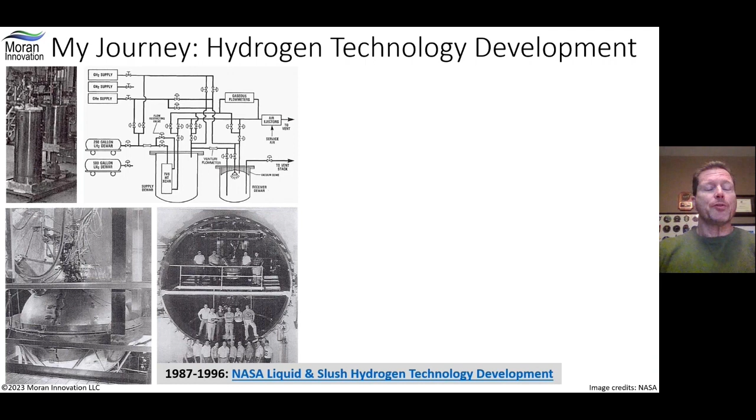And spoiler alert, it can be very exciting responses that you don't want, or it can be very controlled. And understanding those parameters was very important to us at the time, and it remains important, of course. These ground tests during this time frame were to inform flight tests and space exploration programs. But of course, they're useful now for a lot of the groundwork and energy and mobile vehicles on the Earth. So I'm getting a lot of interest in some of this early work that I did in the 80s and 90s.

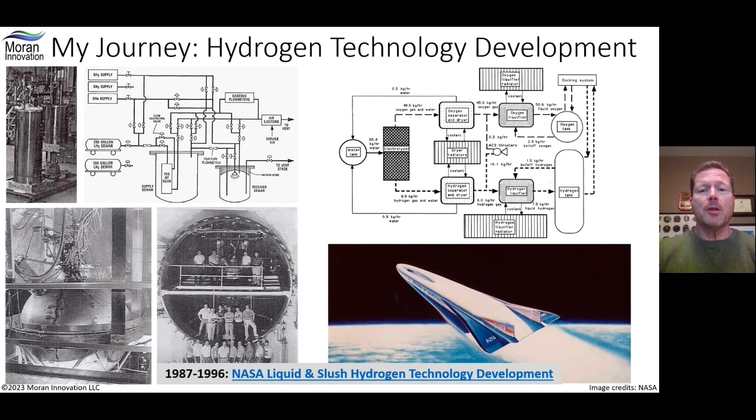The bottom right one is the National Aerospace Plane that I worked on. We did slush hydrogen research, both in terms of technology development and also systems demonstrations. And slush hydrogen is a mixture of solid and liquid hydrogen, and we had up to 50% solid fraction in many of those tests. So a lot of interesting stuff there. And of course, you can pack a lot more hydrogen in when you store it that way.

Well, that changes in space. In space, you don't have gravitational effects, or it's a low gravity, microgravity environment. So the position of liquid and vapor changes. It's driven a lot more by surface tension, by accelerations in the vehicle and that sort of thing. So you have a very different thermodynamics, not totally, but it's certainly very different. So that was a large part of the kinds of research and testing that I did, looking at these kinds of phenomena.

But the evolution in my personal journey was to then start looking at how do you integrate these into launch vehicles and other vehicles of various sorts. And of course, there's corollaries to this in the kind of vehicles that are being looked at now with liquid hydrogen. And then in the bigger picture, how do you integrate this into system architectures, whether in this case it's a space exploration system, or whether it's an export of liquid hydrogen by shipping, for example, or an energy storage of some type, where you've got an architecture where you store and distribute it where you need it. And then finally, what are the key interfaces, which always come into play?

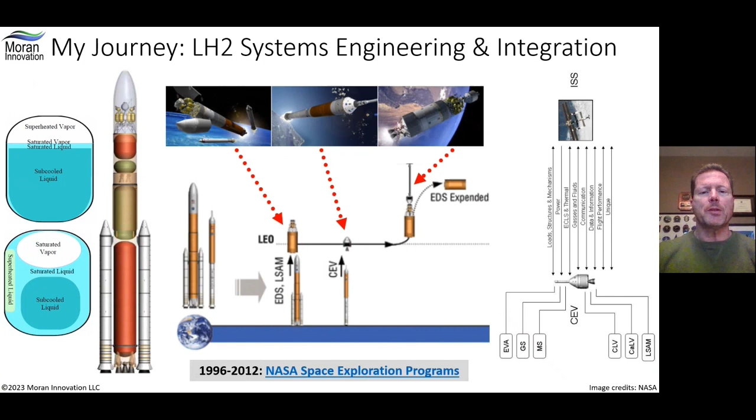One of the things I was responsible for in this time frame was the interface between the new crew exploration vehicles and other visiting vehicles that were coming to the space station, the requirements for that interface. So this was a very important period in my own personal development to understand this big picture, and it has informed and driven my perspective on things going forward. I always look at it from that architecture and then drill down into what solutions make the most sense for that particular system, or system of systems, as the DoD likes to talk about.

So my responsibility in that last 4 years that I was at NASA was to set up and negotiate license agreements with industry partners, trying to transfer that technology and that know-how out to the energy industry in particular, but other industries that were interested in it, as well as the materials. That borrowed heavily on my experiences that I did in my, quote, spare time on the evenings and weekends. NASA allowed me to start multiple companies as long as there wasn't a conflict of interest with my work at NASA. And that's what I did from the mid-90s through today. 5 of those startups I did up through 2016.

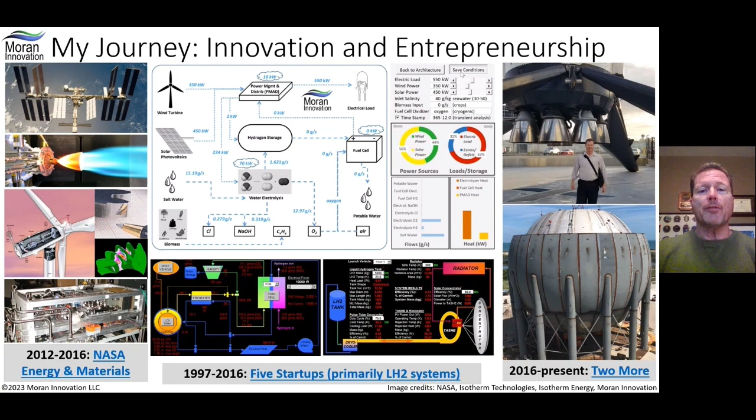And I'll have a lot more to say about that, because there's a great deal of misconceptions about the fact that you have unavoidable boil-off with liquid hydrogen systems, and that's just wrong. The advances in cryogenics, cryocoolers, and cryorefrigeration have gotten to the point now where you can eliminate the boil-off completely and actually re-liquefy.

And this is sort of the compass for this webinar series going forward. It's also equivalent to that time when you get on a plane and the flight attendant tells you what the destination is and tells you that if that's not your desired destination, you need to get off the plane. So this slide is sort of that for folks who look at this and don't like what they see. You're in the wrong place. You don't want to be here or in future sessions.

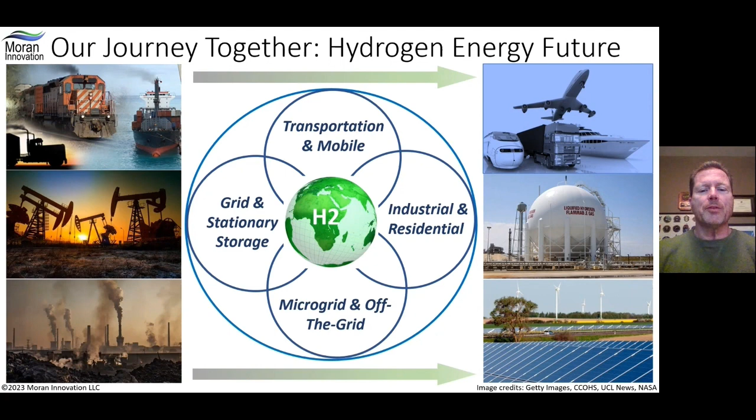On the other hand, if this is a journey that you'd like to take together as a global community and want to be involved in this, you're in the right place. So stay put, and I hope you continue to tune into these sessions. So I'm going to start off with 3 whys. Why is a very powerful question. Toddlers learn it very quickly to challenge the status quo. In their case, it's cookies before dinner or something of that nature. We're going to use it to challenge the status quo with legacy fossil fuels.

So first of all, why transition away from fossil fuels? I think you'd have to be living under a rock for a long time to not understand the climate side of this and the changes. This is a great resource available to folks. I'd invite anybody to take a look at this. This is hard data. This is evidence. And you can look it up. You can see how it's changed over time.

On the left-hand side here is all of the causes. Again, I think these are fairly well known, and we're living through almost all of these right now. In fact, all of them. We've already seen the impacts, and we are heading down this path at a very scary rate. This isn't really news by any stretch of the imagination.

This is fascinating, and by the way, these are all links that I have in these slides that I'll make available afterwards. Carl Sagan gave a congressional testimony in 1985 that basically described every bit of this and told all of us we were going to go there. Al Gore was actually one of the senators in this congressional hearing, and of course, years later, as vice president, he started to focus on this. But I would encourage you to listen to the late Carl Sagan talk about this. It's fascinating.

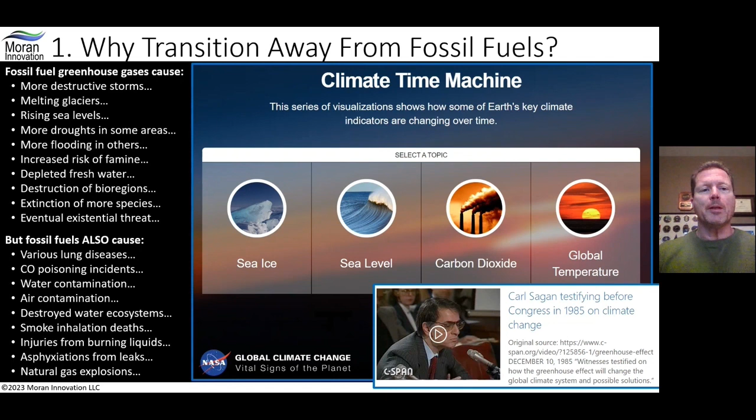Second, why transition to hydrogen? Well, the short answer is to mitigate everything on the previous slide. So just to give you a recall from 1 second ago, that's everything on this slide. Everything is addressed immediately by the transition to hydrogen, or it begins to improve immediately and continues to improve over time once we make that transition or begin making that transition. So that's the short answer. There's a few others here I'll just bring up quickly.

Hydrogen is fascinating from the standpoint that it's an energy carrier, an energy storage method, and a fuel, all 3. That's very unusual in terms of solutions that we have to tackle this issue. It also does not have many of the drawbacks of the other solutions. Now, it has its own. All solutions have their pros and cons, but I'm mentioning here some of the things that are the Achilles heel of many other solutions that simply aren't an issue for hydrogen. It's a very simple, straightforward solution in many regards, and these are some of them.

And then a final aspect of using hydrogen in general, including liquid hydrogen, that is often overlooked, and that's the ability to produce large quantities of potable water from non-potable sources in many cases, including seawater. So there's a lot of synergies here in regions where water scarcity is a problem or is becoming a bigger problem. And that's something that's unique to hydrogen. I'm not aware of any other solution that provides the ability to actually create large amounts of potable water. So something to keep in mind.

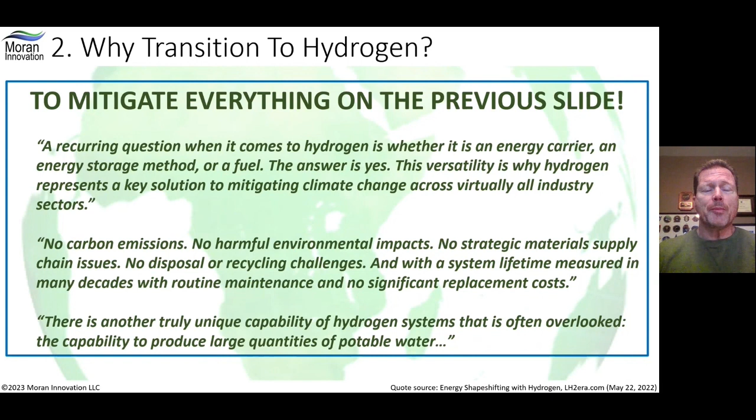So the third why. Okay, if you're convinced of hydrogen being at least a solution to have on the plate and being considered, why liquid hydrogen? This chart has a lot of information on it, but I'll just call your attention to the far right. Any of these solutions make sense for particular use cases, obviously. The question is, when does liquid hydrogen at cryogenic temperatures start to make sense? And that's going to be, as I said, the focus of this webinar series, and it's where my core competency is and where my company's project portfolio is focused.

So when you look at liquid hydrogen, it's low pressure and at a very low temperature as well, minus 253 degrees C or 20 degrees K.

So of course, the low temperature is a challenge. The low pressure, however, is a benefit compared to some of the other options you see there, because you don't have to have large, very thick composite overwrap or other materials that can maintain the kind of pressures that you have in some of these other options.

Liquefaction is the main work input. I use the term work input. That's a thermodynamic cycle terminology, but think of it in terms of the electrical energy that you have to put into the system to get it into the storage mode that you're trying to do. And all of these systems have some amount of work input that you have to provide to store them in the way they need to be stored.

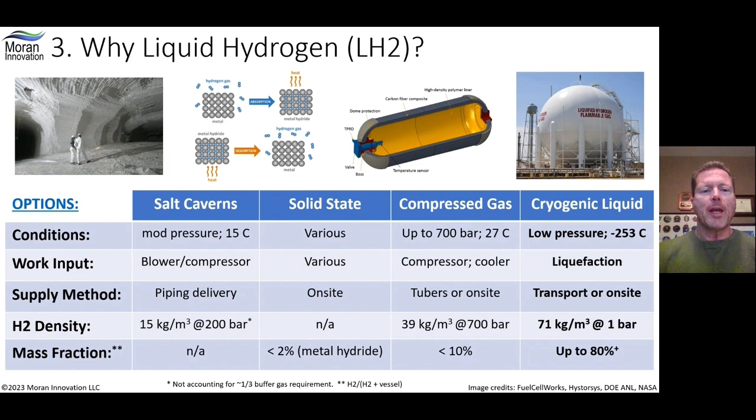And depending on what your application is, for example, the shuttle external tank was in the mid 90s or maybe even upper 90s mass fraction. So those kinds of numbers are possible. Again, I see a lot of quotes and a lot of talk of folks talking about mass fractions. And they keep quoting compressed gas and claiming it's true of all hydrogen storage, and it is not. Liquid hydrogen is much higher.

So I came up with a mnemonic just for this webinar, and I liked it so much, I trademarked it. But it's 2020 vision for the countdown to hydrogen.

Before I get into that, let me describe this graphic very quickly. This is from the U.S. Department of Energy. It is gravimetric density across the horizontal axis. So that's the amount of energy in a unit mass of hydrogen. And then on the vertical axis is volumetric density. So that's the amount of energy in a particular unit of volume. So liter, whatever volume you want. So on top of this then are all the points for various fuels.

What I'm calling the fantasy fuel in the top right corner doesn't exist, but that's why I'm calling it a fantasy fuel. That's where you would love to be. You'd love to have a very dense, both gravimetric and volumetric, energy dense fuel, but it doesn't exist. So you have to make some trades. The trades we've made for the last several decades are the legacy hydrocarbons that you see over kind of the top left there that have a high volumetric density, but a rather mediocre gravimetric density: gasoline, JP8, diesel, and so forth.

You can make the trade to have a little bit less volumetric density, about the same gravimetric density, if you go to propane or liquid methane. Liquefied natural gas, of course, is mostly liquid methane. So you can kind of think of that when you see the word methane. The problem, of course, there is that methane is a 25 times more powerful greenhouse gas than carbon dioxide. So even if it's cleaner, quote unquote, burning, any leakage or releases that you have in your system is having a huge impact on greenhouse gas emissions.

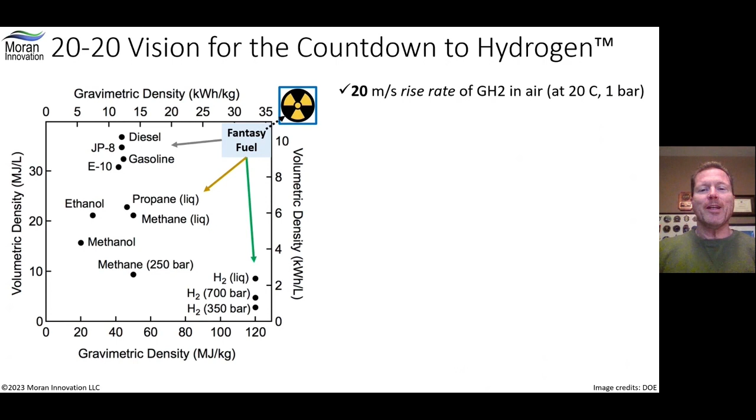And by the way, that's the reason why hydrogen is safer than most legacy fuels in many applications, despite what many people's preconceived notions are. Again, in the safety session, we'll talk more about that. The second 20 in 2020 vision is 20K. That's the temperature in Kelvin, which is equivalent to minus 253 C for liquid hydrogen.

And then the countdown starts at 5. These are the 5 safety tips that you keep topmost in your mind with hydrogen. The first 3 are with any hydrogen: ventilation, leaks, and ignition sources. The last 2 are specifically for liquid hydrogen. Cryogenics, you've got to make sure you have precautions that you're working at very cold temperatures, and phase change from liquid to gas, and in some cases the other direction, that you have to have in mind with operations and design of your systems.

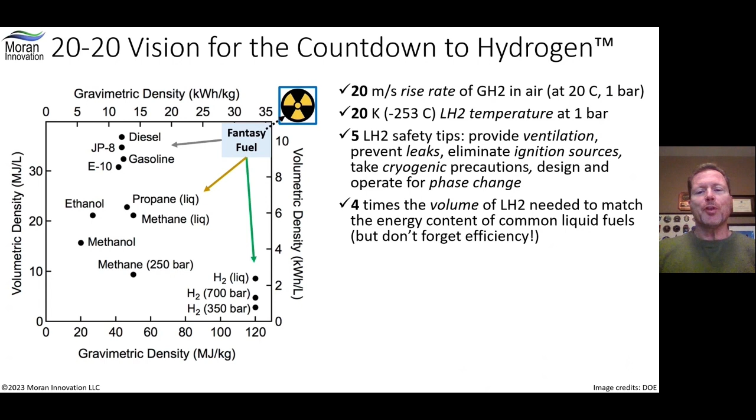4 on the countdown is the volume of hydrogen needed to match the energy content of common liquid fuels, but don't forget efficiency. If you're using a fuel cell that's 2 or 3 times more efficient than your combustion process, then you are starting to eat away at that differential in the amount of volume that's required of hydrogen. 3 times is the energy content by mass of hydrogen compared to the other fuels. So for the same kilogram of hydrogen, you're getting close to 3 times the energy as the legacy fuels we use.

There's 2 spin states of hydrogen, ortho and para, which becomes very important when you start talking about liquid hydrogen at cryogenic temperatures. Again, a topic for the future. 1 proton per atom, which most folks know, and then of course 2 atoms per molecule of hydrogen, and that's why you see H2 used, or LH2. That's what the 2 stands for.

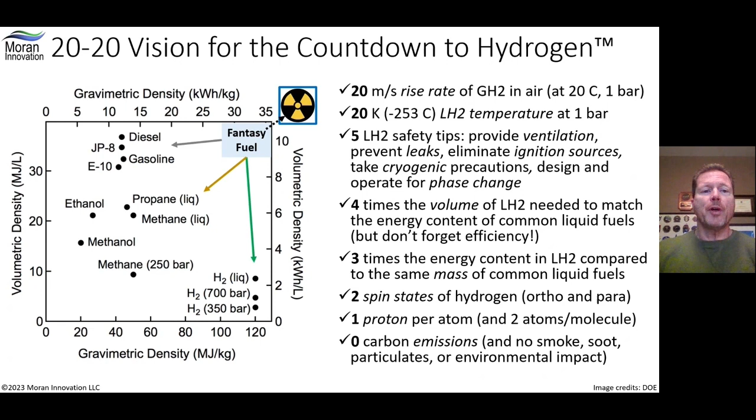And then finally, 0 is the amount of carbon emissions. And as we talked about before, no smoke, no soot, no particles, no environmental impact. And that's another topic we'll talk about in myth busting. There's been some information about that. So I'll end this part of this session with this final slide.

When I finished my career at NASA and started my 6th company, this was our vision. The nexus between energy, water, and food that could be addressed by hydrogen anywhere in the world with renewable energy 24 hours a day and 365 days a year. So this is my call to action, if you want to consider it that: let's build a better future together with hydrogen.

And with that, I'm going to do just a quick look at what sessions are coming up, to whet your appetite. Future sessions, we're going to talk about history, evolution, and testing. If you did the pre-test that I had out before this webinar, you know that hydrogen was the first fuel used to develop jet engines in the 1930s. A liquid hydrogen aircraft engine was successfully flown in the 1950s. A liquid hydrogen engine with afterburner was developed and ground tested successfully also in the 1950s.

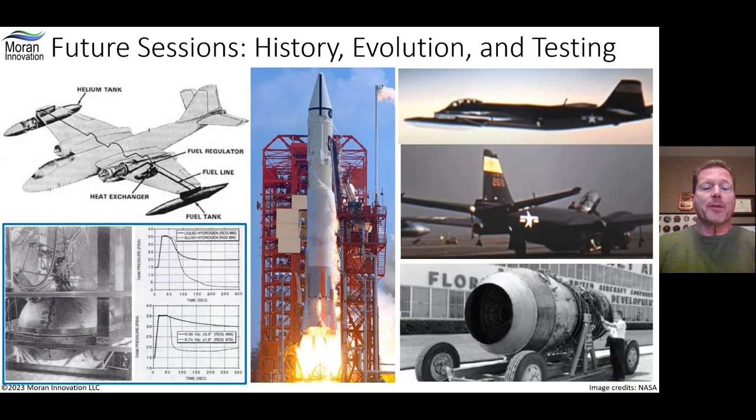And then in the early 1960s, it made the jump to the space industry, and aviation and aeronautics kind of got amnesia for multiple decades about the benefits of hydrogen, while the space industry built out basically all of the necessary technology and systems for large-scale use of liquid hydrogen. So we'll talk about that. Another future session will be on basic safety. This seems to be a very important topic of interest to many folks. So we'll go through how to design and operate liquid hydrogen systems properly.

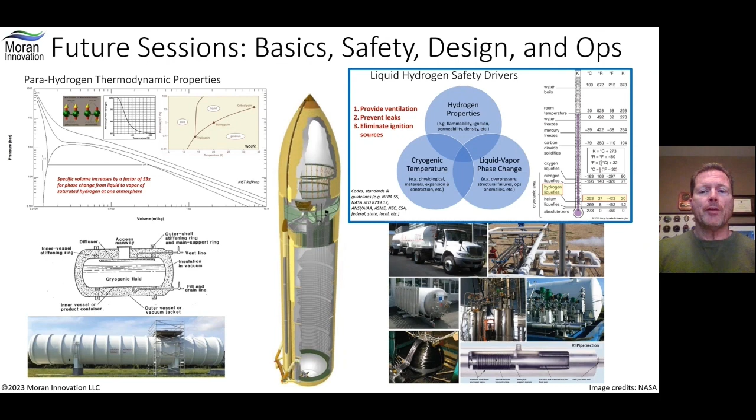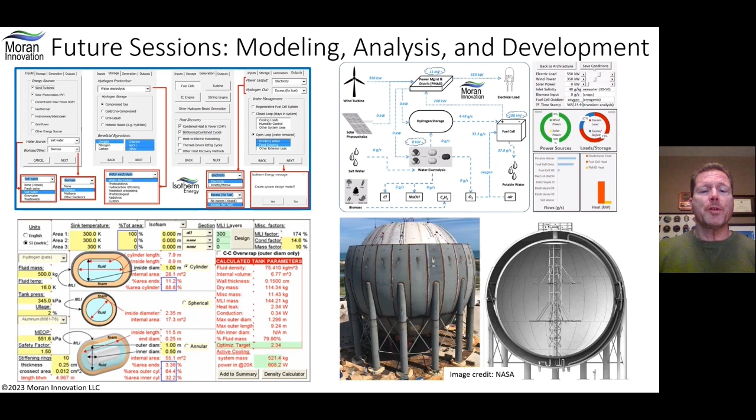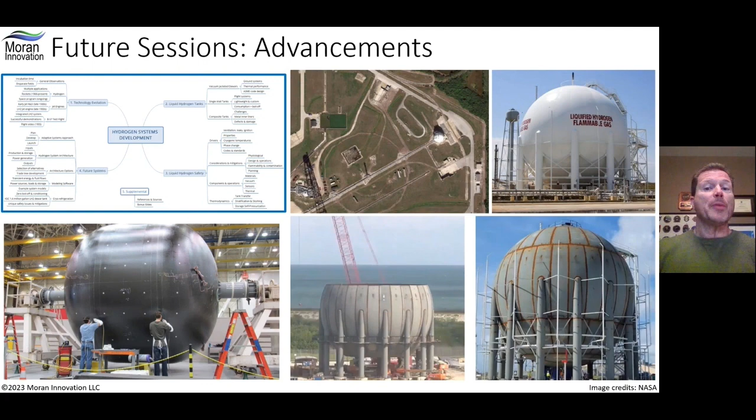Modeling, analysis, and development, as I mentioned, very important to understand what's out there, how to do it, how it impacts and informs your system as you develop it, deploy it and operate it. And then some future advancements. I mentioned cryo-refrigeration, cryocoolers. We'll talk about that. New material advances, composites, thermoplastics that are beginning to be tested and have been tested in the past, actually. There's been quite a bit of testing, particularly composites, that we'll talk about.

And then new engineering tools. And one of the things my company's doing is putting out open source tools available through GitHub and trying to build that up into open source, globally accessible tools that folks can use to begin working with liquid hydrogen systems.

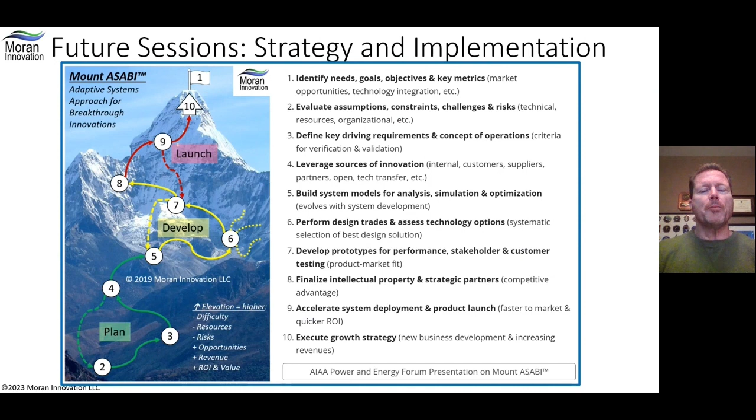And then finally, and I'm not sure where this will hit in our sessions in terms of timing, but this is, I think, critically important: what's the strategy and implementation approach? This is a methodology I've developed over the years and apply to all my projects now, and how you plan, develop, and launch rapidly, but also making sure that you're very comprehensive in your approach.